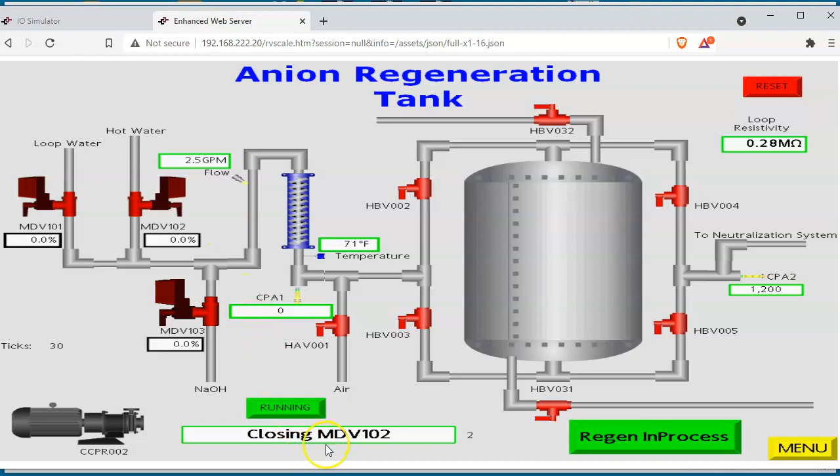This would run for 10 minutes. In this case, I'm going to run it for 30 seconds. You can see that it's ramping up the flow here. At 30 seconds, it will close this valve, and we're going to wait for the flow to go down. Down here, you can see that we're closing MDV 102, and then once that's closed, the operator has to

make a selection. So in this case, we hit the button here, and we can choose between 10 cubic feet, 15, or 20 cubic feet. Depending on what process we pick will determine other parts of this procedure as we go through. So let's pick the 20 cubic foot here. Click the enter button. Now look, the pop-up here comes up.

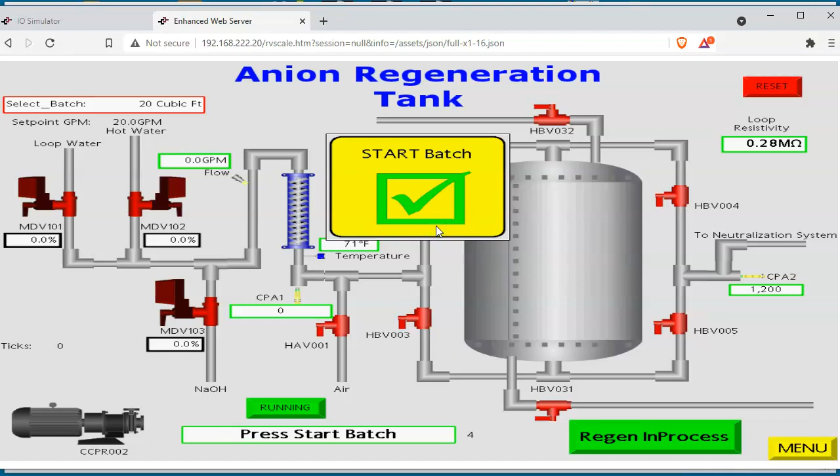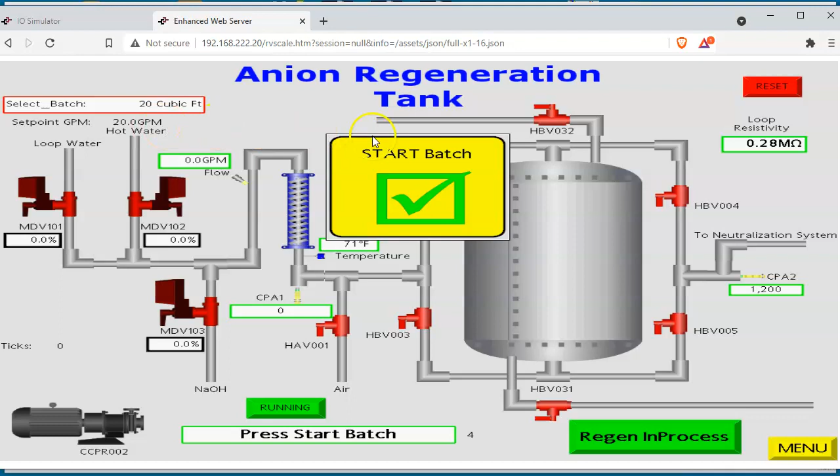So we're going to check this button. Notice down here that we're in section 3 of this, select batch volume. Hit the checkbox here. Now we're going to start the batch. A couple pop-ups over here. We've selected the 20 cubic feet batch, and we're showing some different set points that'll change based on parts of the process. So let's go ahead and start this.

So at this time, it's heating the resin up, and it's letting this hot water into here. So in reality, our actual hot water is going to ramp up a little bit. We're trying to keep the water at 110 degrees. So if our temperature drops too low, we will close the loop water here.

And if we get too hot, we'll let the cold water in. So you see right now the temperature is at 143. And of course, if it drops below 110, we're trying to keep it never below 110. So that's what's going on right there.

So now after that procedure, we're in the mixing chemical stage. So now, depending on our CPA value here, we're going to open this valve here, turn on the pump, and we're adding some chemicals to our solution here. This should run for this example 30 minutes, but in the video, we're going to cut this down to 45 seconds, I believe. We'll go to 45 seconds here. Yeah.

So it's actually going to try to ramp this guy up. Should try to get up to, I believe, around 180 in this case. 170 is, I think, our set point. So it's sitting there oscillating, and we're holding the gallons here. Okay, now we're closing all the valves and moving on to the next procedure.

And then we have a 30-minute contact time here where it's going to sit for 30 minutes in the tank in this state, everything's closed. So that's what's going on right now. This should continue on for 45 seconds for this example.

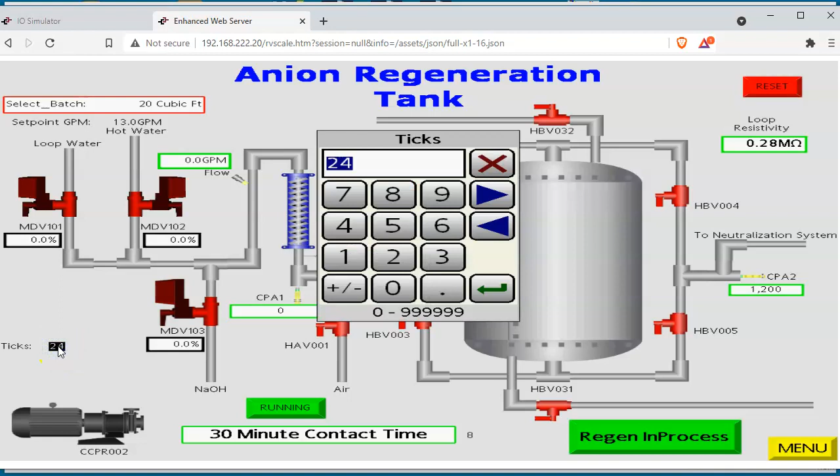Now I can quickly change that by clicking here. Maybe I can't, and I can put in, let's put in 40 for instance. That'll get us closer to 45. We'll cheat.

Now we're in the slow rinse cycle. So we're going to check this button here, and it's going to open a valve here of loop water, and it's going to run the loop water through here. It'll do this for 30 minutes. In this case, it'll be 45 seconds for this example, but the slow rinse has the gallons per minute set to 10 gallons per minute, so we should watch this ramp up to roughly around 10.

It's going to oscillate through there as we open and close the valve to try to keep this at around 10 gallons per minute. Looks like it's going a little high, but it should come back down. There we go. Of course, this is all simulated I/O. Since I don't have the real I/O, I'm simulating here. And then after this section, we're going to go to fast rinse.

You'll see here, this is going to change to fast rinse. Here we're in the fast rinse now. Now we're going to update and do 30 gallons per minute. So now the valve is really going to open. We're going to put some fast rinse water through here. And the goal now is way over here.

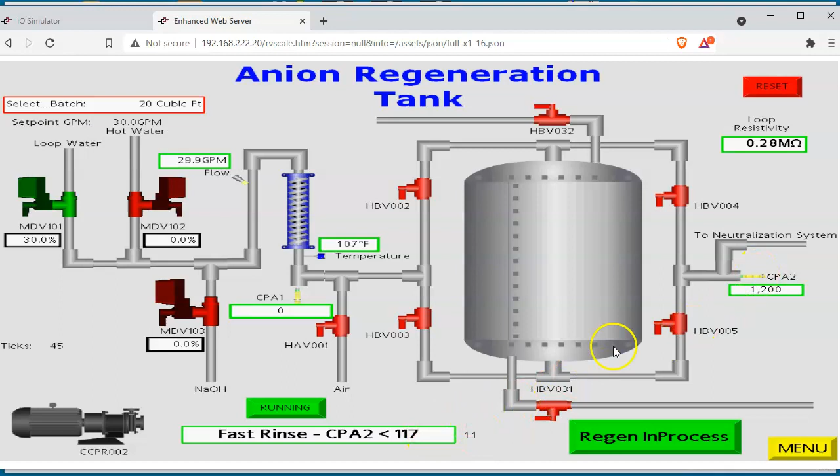We've got some liquid coming out, some kind of sensor that's measuring some CPA value. I don't know what it is. But when this gets below 117, that's when the process is done. We've pretty much filtered everything out, and once it gets below 117, that's when the fast rinse is done.

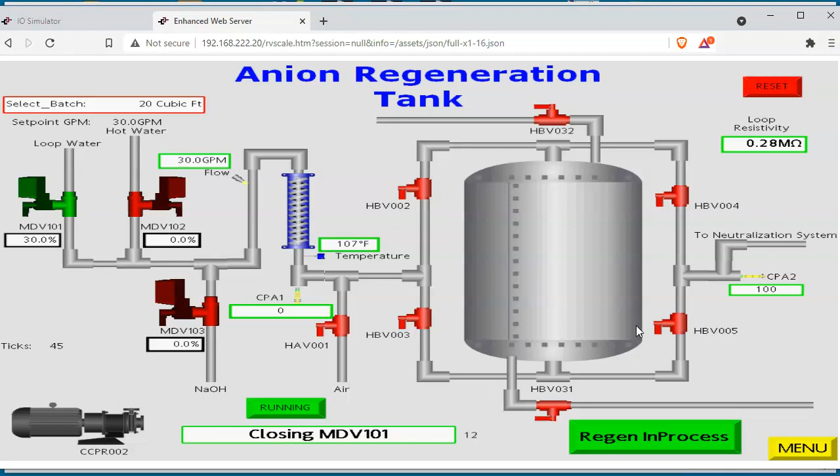So if we mimic here, see if we can get that CPA2 to go down. There we go. Once it drops below 117, the process will complete. There we go. And now we click the button, acknowledge, job complete, and the whole process is complete, finished. So that's how that operates in that case.

All right, so since you saw the procedure there, let me show you the Crimson database that runs this application. So here's the Anion graphic we were just looking at. I've got a bunch of other pages here that we're not actually interacting with, but this is the main page that you saw, and all of the logic that happens on this one is running over in the program section, and we're just simply running this particular code right here for the Anion logic, and this is what executes using a switch/case statement to determine what particular section we're at in the code as we go through the procedure.

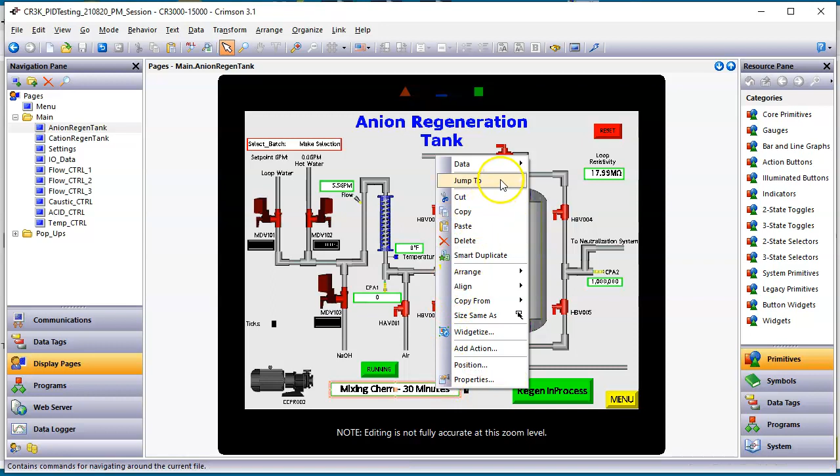Another thing I'll point out to you, you notice that when I was doing the display page, I was picking on this area right here to tell me what stage I'm at. Well, this is pretty cool, team. This is nothing more than just a multi-state tag. So if I right click and do jump to, it takes me to the tag that's controlling it. And if I go to the format tab, you can see right here, here's all of those steps, and then here's the string text wording for it instead of just a number. That's kind of what lets us know where we're at. So that's the steps, and everything is executed over here in a case switch statement.

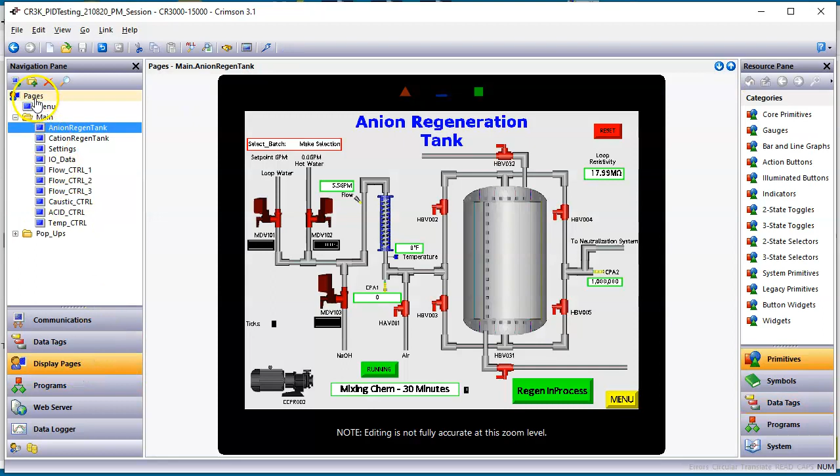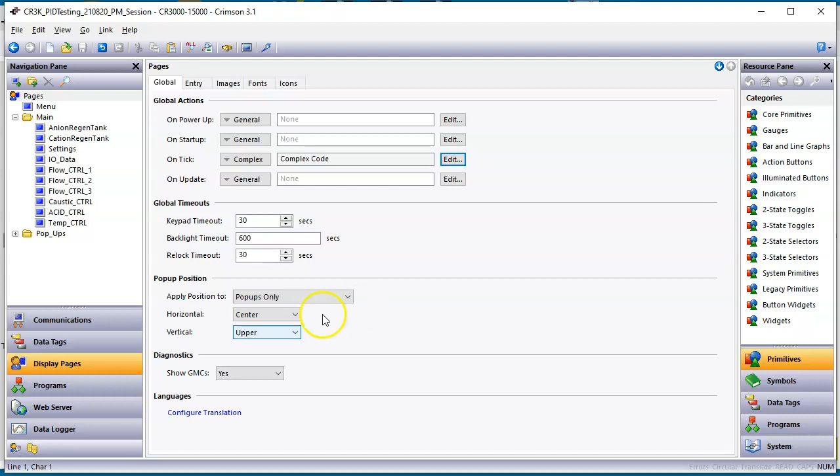And this program in this application is being run way back at display pages, at top of pages, in the complex code on tick once a second. I'm running both the Anion logic and cation logic, which is what my next video will cover, the cation. So we just went through the Anion, but anyway, just thought I'd share that with you. Pretty cool process. Everything is done really through this code. It's step by step and runs pretty nice actually. Yep, I'm going to do some videos on case switch statements, how you can use that. I think it's a wonderful application to share with you guys.